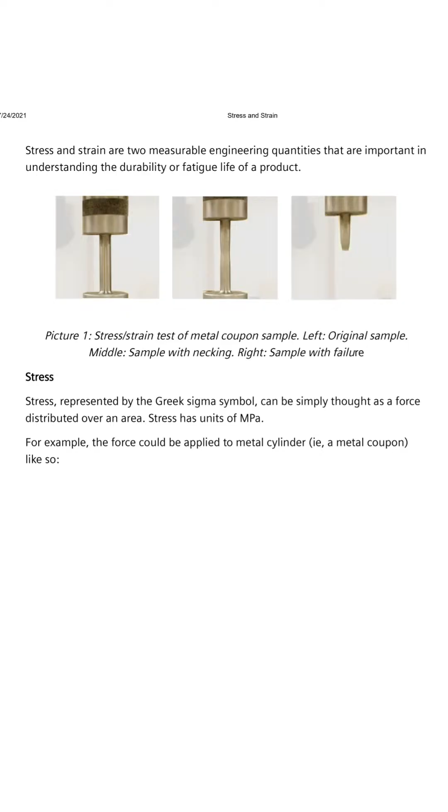Stress and strain help us answer these questions. Stress tells us how much internal force is being carried by a particular area of the material. Strain tells us how much the material deforms relative to its original size. Keep this simple idea in mind: load causes deformation, and stress and strain describe what happens inside the material.

Let's start with stress. On this page, we can see a simple tensile test performed on a metal specimen. On the left, we have the original specimen. In the middle, the specimen has been loaded and has started to deform, including the formation of a necked region. On the right, the specimen has finally fractured. This simple tensile test helps us understand the relationship between load, stress, strain, and failure.

Stress is represented by the Greek letter sigma. The simplest way to think about stress is that it is force distributed over an area. The unit of stress is commonly pascals or megapascals. If a force is applied to a metal coupon, the effect depends not only on the force but also on the area over which it acts. If the force is large, we might expect high stress. But if the same force is distributed over a larger area, the stress will be lower.

Now let's look at the equation. We have a simple cylinder with a force F acting on it, and the cross-sectional area is represented by A. The stress is calculated as sigma equals F divided by A. So stress is simply the applied force divided by the cross-sectional area. Suppose we have a force of 10,000 newtons acting on an area of 1,000 square millimeters. The stress would be 10 newtons per square millimeter or 10 MPa.

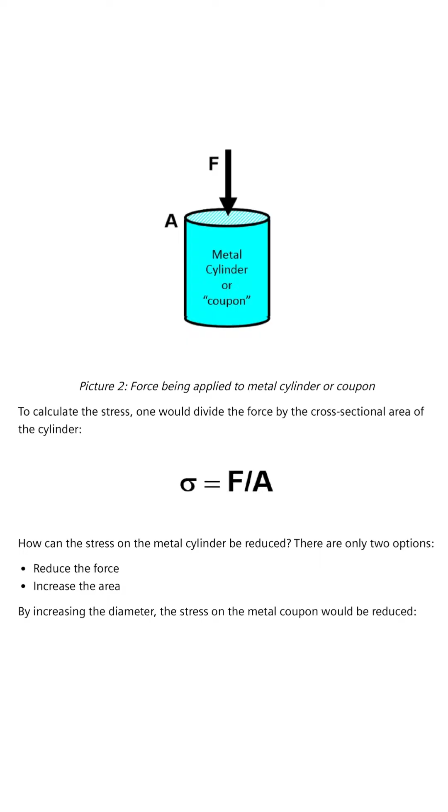Now the important engineering question is, how can we reduce the stress? According to this equation, there are two basic possibilities. Number one, reduce the force. Number two, increase the area. If we cannot reduce the applied load, one straightforward way to reduce stress is to increase the cross-sectional area.

Imagine two components carrying exactly the same force. The component with a larger diameter has a larger cross-sectional area, so the same force is distributed over more material. Therefore, the stress is lower. This simple concept has a major consequence in engineering design. If we keep increasing the size, we can reduce stress.

But in real engineering design, things are not that simple. Increasing the cross-sectional area also increases the amount of material. That means the component becomes heavier and more expensive. In automotive and aerospace applications, unnecessary weight can also reduce overall energy efficiency. So we cannot simply design every component to be extremely large. We need to find an optimum design, strong enough for the real loading environment, but without unnecessary material.

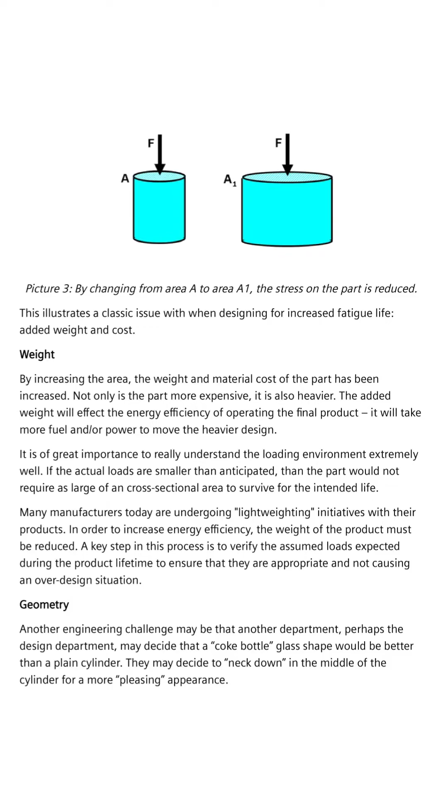Now there is another challenge. What happens if the component is not a simple cylinder? What happens if the designer changes the geometry? Here we have a component with a reduced section in the middle. Someone might say that we already increased the size, so the stress should be low. But the middle section has been necked down. That means the effective cross-sectional area in that region is smaller. Since our basic equation is sigma equals F divided by A, if the effective area decreases, the local stress increases.

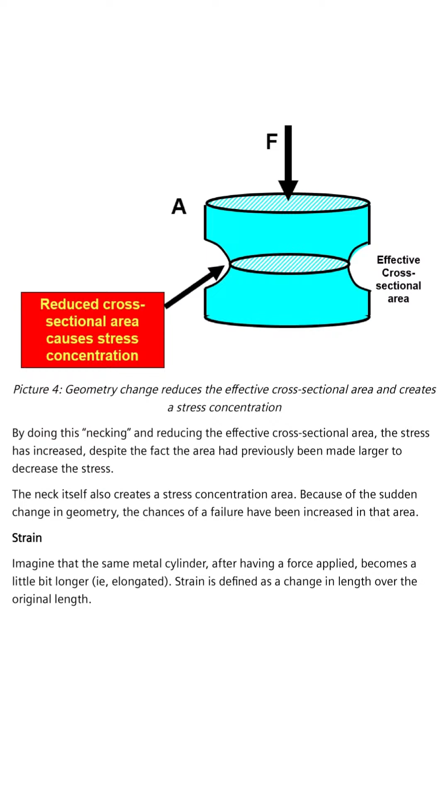There is also another effect. The sudden change in geometry creates what we call a stress concentration. Even if the average stress calculated using force divided by area appears acceptable, the local stress near the geometric discontinuity can be much higher. This happens in real components around holes, sharp corners, notches, grooves, abrupt thickness changes, and other sudden geometry changes. These locations can become critical locations for fatigue failure.

Now let's move from stress to the second important quantity, strain. Imagine that we apply a tensile force to this metal cylinder. The cylinder becomes slightly longer. The amount by which it becomes longer is the change in length. Strain tells us how large that change is compared with the original length.

On this page, we can see the original cylinder and the elongated cylinder. The original length is represented by L0 and the change in length is delta L. Strain is defined as epsilon equals delta L divided by L0. So strain is the change in length divided by the original length. Both the numerator and denominator have units of length such as millimeters. Therefore, the units cancel out and strain is dimensionless. Because the actual deformation is often extremely small, engineers commonly use microstrain. One example is a strain value of 0.000050.

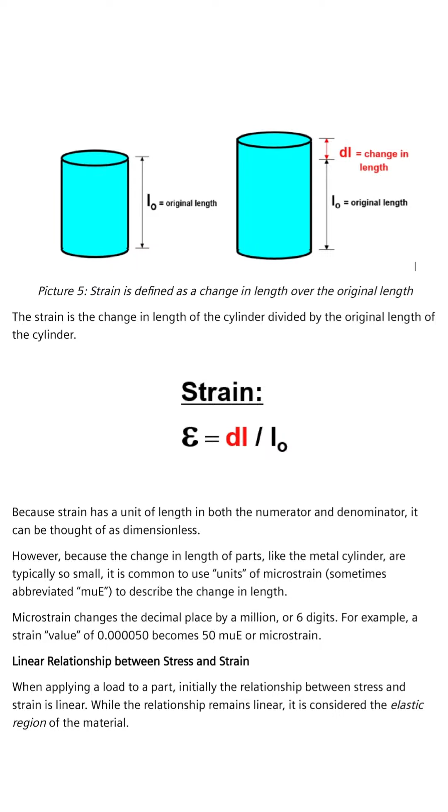The word elastic is very important. If the material remains within this region and we remove the load, the component returns to its original shape. The slope of the straight line portion of the stress-strain curve is called Young's modulus, represented by E.

The relationship is sigma equals E times epsilon. We can also write E equals change in stress divided by change in strain. Young's modulus tells us how much stress is required to produce a certain amount of strain in the elastic region.

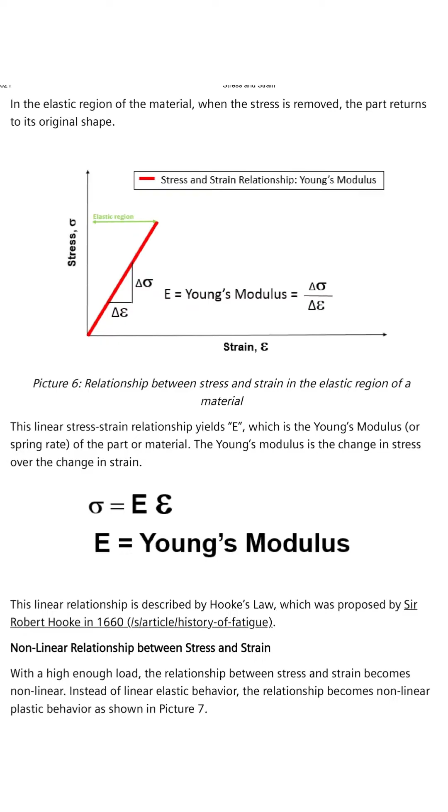This curve is extremely important for understanding material behavior. But there is another distinction: we need to understand engineering stress versus true stress. Now let's look more carefully at what happens to the cross-sectional area as the specimen is loaded. Initially, the specimen has an original cross-sectional area represented by A0. As we apply more load, the specimen deforms.

During tensile loading, the cross-sectional area changes. Especially during necking, the local area becomes significantly smaller. Engineering stress does not account for this changing area. Engineering stress is calculated using the original cross-sectional area. So conceptually, engineering stress equals force divided by the original area.

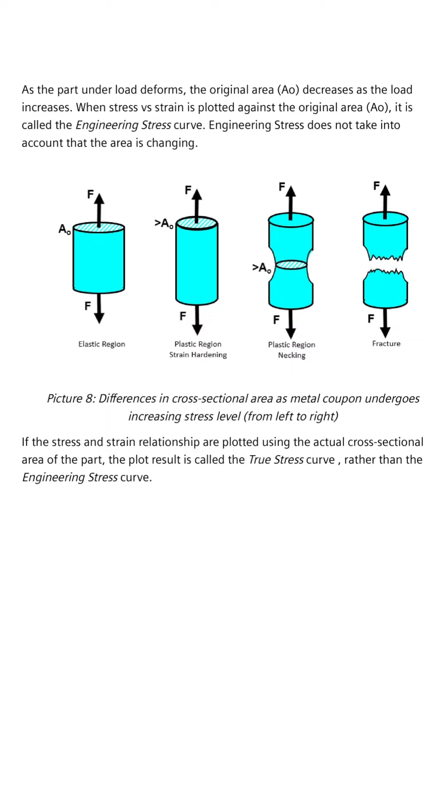So let's summarize the complete story. We start with an applied load. That load produces stress in the material. The material responds by deforming, and that deformation is described by strain. Initially, stress and strain have a linear relationship. This is the elastic region, and the slope of this region gives us Young's modulus. If we remove the load within the elastic region, the component returns to its original shape.

If we continue increasing the load and cross the yield point, the material enters the plastic region. Permanent deformation now occurs. As the load continues to increase, we eventually reach ultimate strength. Then necking begins and eventually the specimen fractures. Because the cross-sectional area changes during deformation, we distinguish between engineering stress, which uses the original area, and true stress, which uses the actual area.

Before we finish, let's summarize the key equations and concepts. First, stress is force divided by area. Sigma equals F divided by A. For the same force, increasing the area reduces the stress. Second, strain is change in length divided by original length: epsilon equals delta L divided by L0. Strain is dimensionless and is often expressed in microstrain.